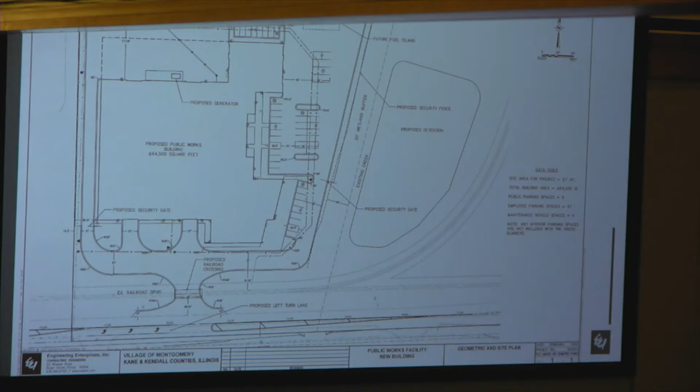And that crossing will hopefully be removed. It's our goal to get that old rail removed because it's out of service, and we're working closely with BNSF for the access across the rail as well as the removal of those old rail tracks. Other than that, I don't know, Pete, did you have anything else? That's it, unless there's questions for us right now or later.

Question: since Dallas is having all these problems, that proposed generator—is it gas, electric, propane, what is it?

So current... you want to sit down? You can sit down if you want. That's fine. You got it?

So currently, the plan is for the generator at the Public Works site to be powered off natural gas. We're still doing some calculations—we've got to determine what the loads are to determine whether or not it warrants natural gas versus diesel. That's something the electrical engineers will be handling as we get further into the project. Ideally, we want to stay natural gas; it's an easier option for us. We don't have to deal with refueling diesel, and we don't have to deal with setbacks from the building as it relates to diesel storage tanks and so forth. So our goal is to stay natural gas, but we're still evaluating.

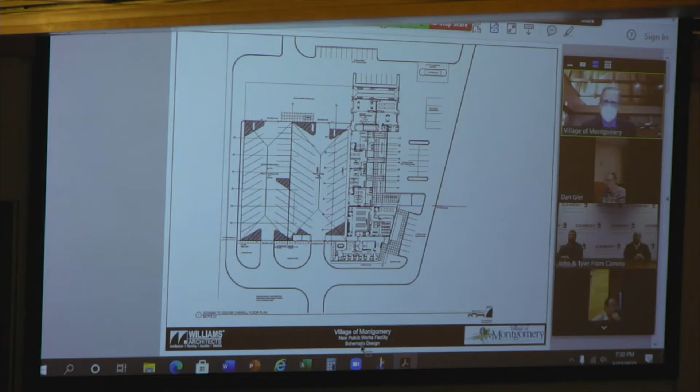All good things. All right, now if I can find the next sheet here. Do I have to stop sharing and share again and get the next sheet up? No? All right, well. Sure. That was way too easy. Thanks for that little arrow.

Okay, all right. The building's been rotated 90 degrees to have it fit on the sheet better, but this is that large garage zone. It has two drive aisles. These have all been set up in dimension to hold the equipment you have. So we have a chart showing every vehicle your department has and how big they are. We've worked with EEI to check turning radiuses, so we've got basically one-way aisles that flow through one way, then flow through the other. These various parking spaces are all sized to hold the equipment and vehicles that are going to be there, and the drive aisles are sized to allow the turning radiuses to work with the overhead doors. So it's a good, efficient building.

They'll bring your equipment inside, very important for their longevity. It also helps get the snow and ice off the plows in the wintertime so that they can melt off and be ready to go the next day. This layout's proven to be very effective and cost effective on square footage. It keeps your people working efficiently so they don't have to spend all their time moving equipment around to get one item out to get the next item out, and it really helps them work their day quickly.

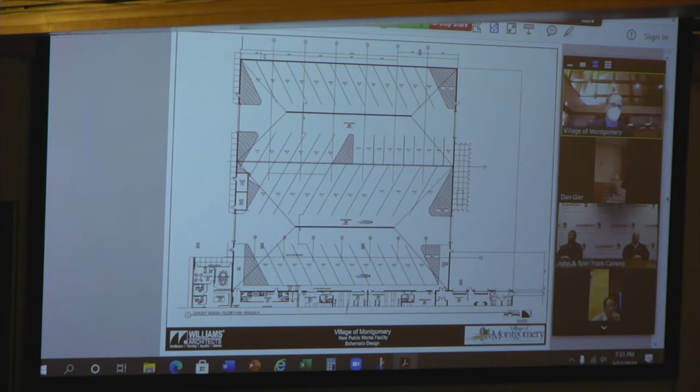All right, and then here, this area on the lower left is the administration and common areas. We have an administration zone here with an entry door off the visitor parking lot. They can come in, have reception, waiting area, back to the offices, common shared bathrooms, conference rooms, copy areas. Going to the north here, we have a split room that can be just a kitchen with a large eating area for staff to come in during snow events, so all the people can come in and catch up on what's going on. But we can also subdivide this off to allow separate training areas and events, HR training, etc., that's so important for departments nowadays.

At the corner here, we have a modest wellness area with some workout equipment to help keep the workers fit, and then we have a locker room area. The approach nowadays with locker rooms and bathrooms is not to have a male and female locker room because the ratios between male and female keep changing, and that's a problem. Folks like privacy, and the way the government's moving on their regulations, we are seeing the rules constantly in motion right now. We believe the way to stay ahead of gender neutrality issues is to provide unisex locker zones and then individual toilet and shower rooms. That means every employee has a locker, they're all in one zone. They know how many employees they're going to have, so that's the number you have. You don't have to add 10 or 20 more to account for shifts between locker rooms. We have enough of these changing rooms and bathrooms to allow folks to come in, close the door, take their shower, use the facilities as they need to. This has proven to be really effective in creating good morale, and folks just really like these. We've been doing these on police, fire stations, rec centers, Carpentersville Public Works. We did this, and it's all been very well received.

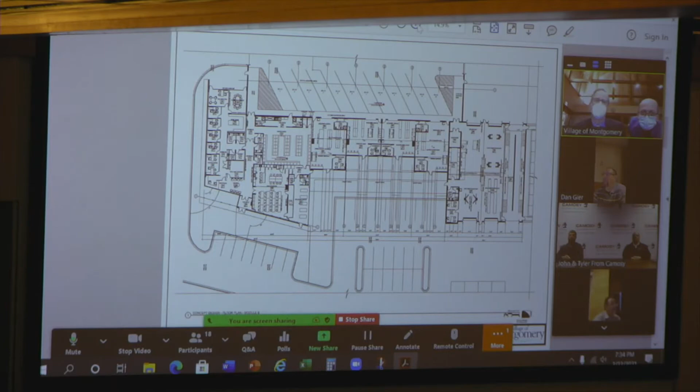Middle of the screen? There you go. All right, thank you. Oh, look at that. Is it a touch screen or no? That's really helpful. I guess I'll use the arrows.

Thank you very much for that, that helped. No problem, it's kind of squished. I mean, I believed what you were saying, but now I get to see it. Now you know what we're talking about. You can go, discover - ah, that was what he's talking about. Sorry, sorry it was hard for you to get it. That's it.

All right, so then if you want, yeah, you can scroll that around. Okay, thanks. Fine, all right.

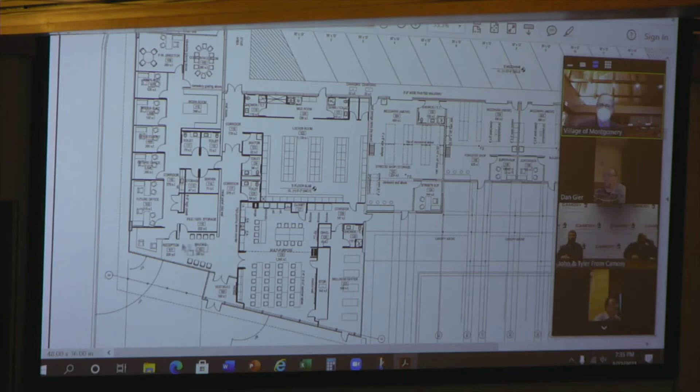So again, back to this - this is the front door area from the parking lot, waiting lobby area, reception zone when needed, file storage, individual bathrooms, computers, offices, meeting room, sort of in this admin area. And then down this corridor, you can also go to the right, and this is that lunchroom with a subdividable training area, so they can do meetings and lunches or open it up for larger events. And then behind there is, like I said, a modest wellness center with its own bathroom, shower and changing area, some vending areas.

And here's that unisex lockers with the adjoining bathroom and showers. And then this zone here is a mudroom, again very important in public works - people come back from the field having done some difficult and muddy things, especially at this time of year with a water main break. And they can come in and wash things off, hang things up, change and clean up with showers right there, so a good system.

Where's the staff entrance? Staff entrance is - they can enter the front door here, and there are doors into each of the shops. So they can come from the visitor and their parking areas out front here and get into each of their shops. And then also, as we get up here to the fleet zone, they also have parking adjacent to it, and they have doors they can get in as well. So they don't have to come in just one door.

I was just thinking flow for when a crew's out in a water main break and coming back full of mud, full of everything. Right - they would probably be actually pulling into the bay, park their vehicles right behind their shops, get out right there, and then go clean up. Perfect, thank you, very good question.

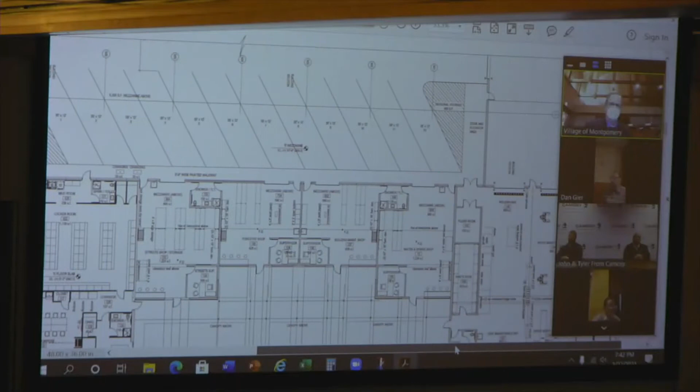Can't let you look at that yet. Good for you. All right. Yeah, there you go. Thanks. Thanks for all the help.

This whole rectangle here is the fleet maintenance. There's an office for a couple of people to work, and they have their own bathroom again with a shower, so they don't have to walk far. We have part storage that's locked off, and a room that holds all the fluids - different oils, transmission fluid, all the things that are pumped overhead to reels that they use to pull down and fill for the vehicles.

There are 2 drive-through bays that have different uses. The one in the middle of the building is for heavy-duty trucks - we have very large heavy-duty parallel pads that come out of the ground, rails that can lift very heavy trucks. These are representative of 4 mobile lifts - they roll around anywhere you want, pick things up, and they all talk to each other so it keeps everything level. You can pick up all kinds of different things with those, or move them out of the way to have a nice big zone of the floor to work on.

This quadrant is used significantly for tires and welding and work like that. This lower left area is more for vehicle pickup trucks, so working on the police vehicles and other cars and SUVs would go in this area.

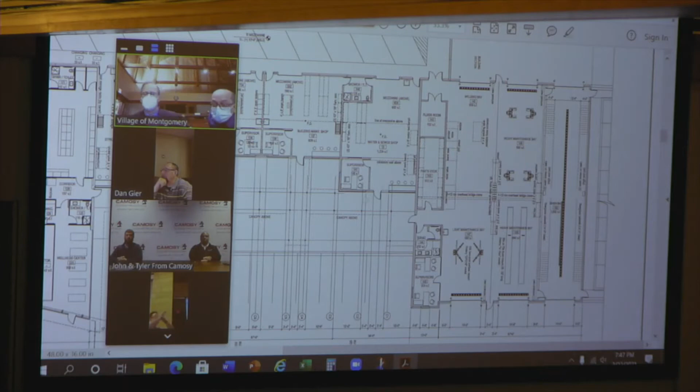We've come up with 3 exteriors to look at. They're all the same basic design, it really isn't a matter of something greatly different. We're really talking about the look and materials. There are pros and cons to the various materials we're going to look at. If you folks reach a comfort level on one of the designs over the others, that would help the team move forward with that look, along with other input you could give us as we want to further refine this.

How come you're not moving?

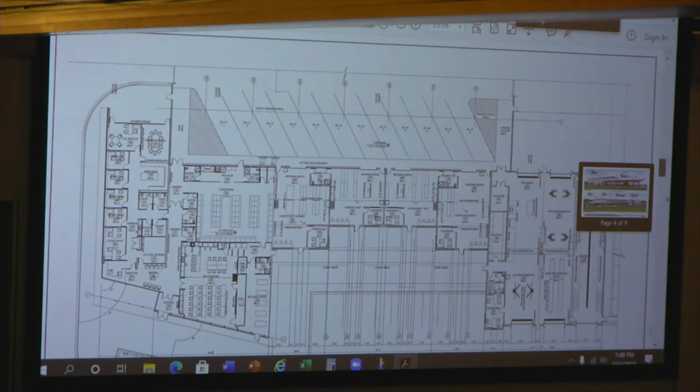Yeah, it didn't do it right away there, but it's coming now. There you go. Now it froze on you. Come on, come on, come on. All right.

This is option 1. I'll focus on one initially. This is from the southeast corner looking northwest. You'll see the large garage area up here on the upper left corner, the two main garage doors that vehicles would come and go through.

The precast panels, we're looking to put some clerestory windows around the top in certain select areas. We do that because we're trying to reduce the number of skylights we have to have while still getting good light in. None of us want to use more skylights than we have to. However, Illinois energy codes absolutely require big rooms to have skylights once you get certain sizes.

So we're simply trying to manage how many we have to have by bringing light in around the edges. This is all just precast concrete. We'll put some grooves in it, paint it nicely. Here's the administrative side of the building. This basic look we're calling sort of our brick look.

So what you'll see on the right side there is the nice overhang when you come into the building. You see the lobby area glassed in here, sort of on the right. My arrow's not showing up very well. And then the long stretch of offices with some brick around it.

Okay, moving to a different look here, different angle of view. This is more from the west looking back, you know, from the east looking back west. On the lower left zone you see the entry area, some glass to the right of that where the training room is, and beyond that more glass combined with the wellness area.

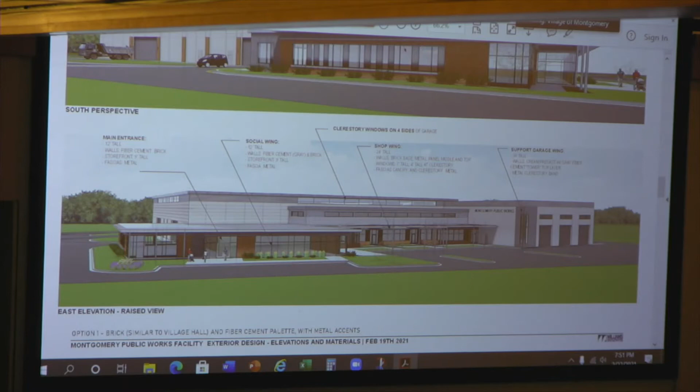So we call that the brick approach, option one. A couple more quick views of that as well. This is directly west, looking directly - on the east, looking directly west. Again you see the office area on the left, the shops in the middle, garage areas on the right.

All right, so moving down, going to look at option 2, we call it. Still trying to get past the pages here. They hang up on me, my apologies.

So we call this option 2. We're really using a lot less brick, and we're using more fiber cement panels. These are rectangular shaped panels made out of a mixture of actual cement and some fibers. They cast them in whatever shape and colors you want. Again, very durable, long-term material. But by using that material instead of the brick, we find that the buildings have more of a sleeker, more modern look. So here again we could adjust the colors of those panels a bit.

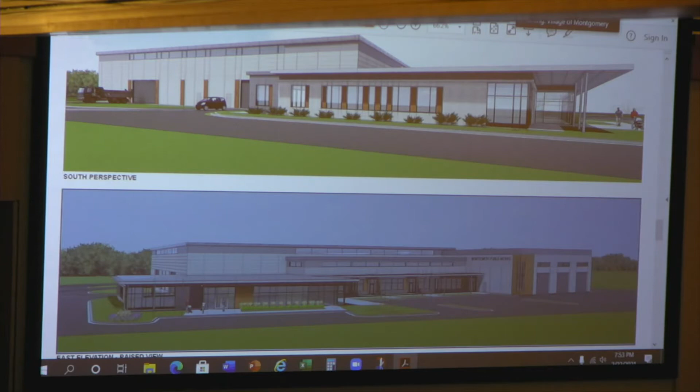We're still bringing in some pieces, some aspects of brick, on the big garage areas, also some between the windows and the office zone. And then looking at the whole building from the southeast looking northwest, we're still bringing some brick in between some window areas, the corner, and further north at the fleet area, some brick at that corner.

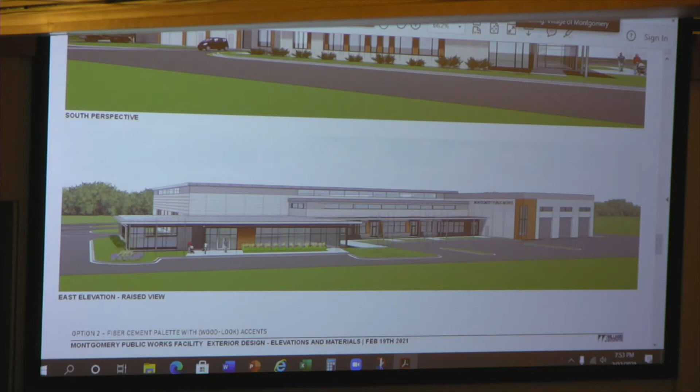But as you can tell, we've pushed the design to reduce the brick and increase the number of panels we're using. We think it looks like a more modern building, a little less brick, a little less warm, but in some places some clients really like a sleeker look to their project.

We're going to move down and see a ground angle view of this option. The upper picture is from the east, looking directly west, with the admin entry, common areas, and shops straight ahead, and fleet maintenance on the right. Another angle shows you looking right at the main entrance with glass to the training and wellness area and the fleet area in the background. So again, we've reduced some brick and increased the panel look.

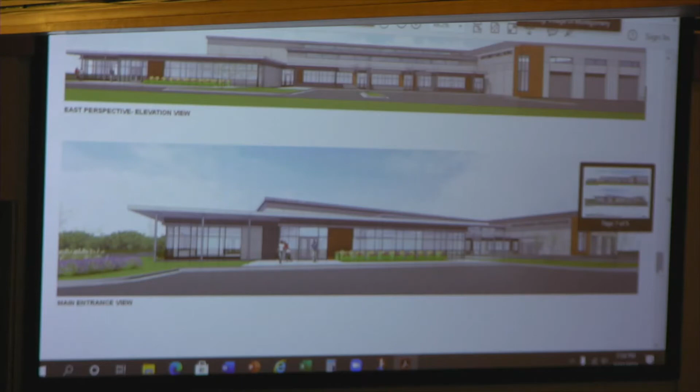Now, option 3. Here we've gone even further and further reduced the amount of brick. Frankly, I don't know if there's really much of any brick left. Sorry, trying to get the right picture here. So in this one, there's even less brick and more metal panel. Instead of the cement panels having a rougher texture, the metals are smooth and slick looking.

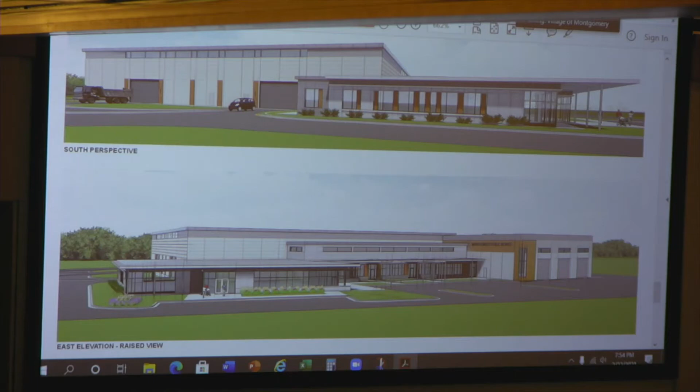So in the third one, we're thinking maybe we'll use more metal panels, so the building has a smoother look, more metal in the areas that aren't precast. Again, this pushes the building a bit more in the modern direction. These are all products designed to last for decades outside — nothing here is wildly expensive, and nothing here is short term.

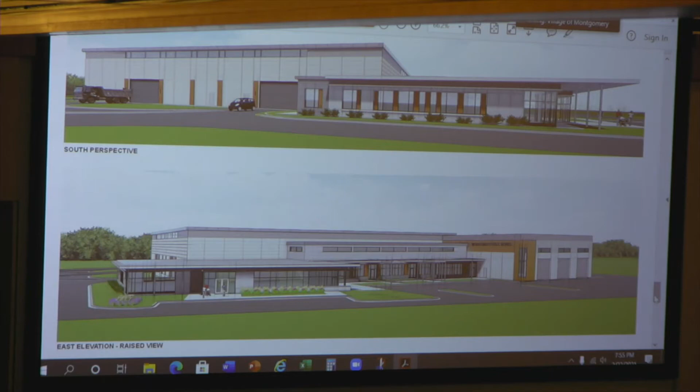If I can get to the last one of that... Can't switch between pages with the arrows. I've got to do it manually, so my apologies.

So again, looking from the east and directly west with concept 3, you can see there really isn't much in the way of brick. It's really panel systems, metal, sort of sleek looking with the glass and the overhangs.

So these are the 3 options. We believe they're all working within your budgets. They're all durable materials, mid-range. We just thought we'd put this out there, and as your architect, give you some ideas and see if one is more appealing to you than the others.

Of the 3 options, which seems to be the most cost-effective? I think cost-wise they're all in the same ballpark. To say there's one higher than the other — maybe when Camosy comes on later they could tell you if one tips more than the other. From our perspective, having had a lot of success with brick over the years, my personal suggestion would be to look at the brick one closely and see if you like it, because I think cost-wise it'll come in well, and you'll find you simply have less coating and reworking issues in the decades to come. Thank you.

If I could jump in for a minute, as staff, when we evaluated the 3 options, going along with what Mark stated, we prefer option 1, the brick option as well, mostly related to the durability factor. Anytime you start attaching fiber cement materials and metal materials, there's defects, UV rays, and different things that come into effect over the longevity of the product. Brick is brick — it holds up well, it's very durable. That's been one of our mantras throughout this project: using materials that are going to be durable. As Public Works, we spend a lot of time out in the field addressing infrastructure and different things. The last thing we want is to spend extra time dealing with keeping a building up and running. So durability has been one of our key things — as Mark talked about, reducing the amount of skylights and roof penetrations so we don't have as many potentials for roof leaks as the facility ages. Those are the things we're really trying to strive toward: minimizing the maintenance.

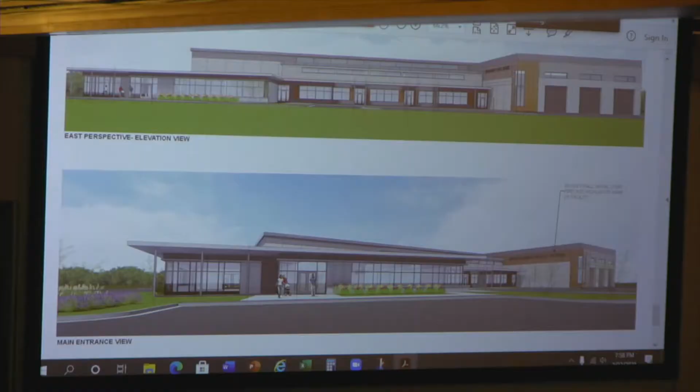I'm concerned that there's a real lot of glass around that community area, along with the whole lobby area. That's a lot of glass cleaning every week that we're going to be paying for. That's something we evaluated and looked at, and we're still looking at in this process. The energy and lighting codes reflect some of that, where glass is needed to obtain that, but that's been a concern throughout the project. Surprisingly, we've actually reduced some of the glass—I know it's hard to believe, but we've cut back a little bit. So again, something we're still working on, and good feedback to have.

I would just say that the areas with the biggest glass, other than the front entry lobby—and a front entry lobby having a lot of glass is not a terribly unusual thing, it can be a positive for how folks enjoy the building—the bigger glassy areas in the common zone are the lunchroom and the wellness center. These are fairly deep rooms with no glass on the sides, so we're trying to get enough light on this side so it can penetrate deep enough, so folks coming in to work out or have lunch still get good daylighting opportunities. But like Mark said, we've already reduced the glass in some other areas substantially. All good ideas—you hit it right on the head. We're talking about this glass right now.

Excellent. Any other questions? I had a couple, if you have a second.

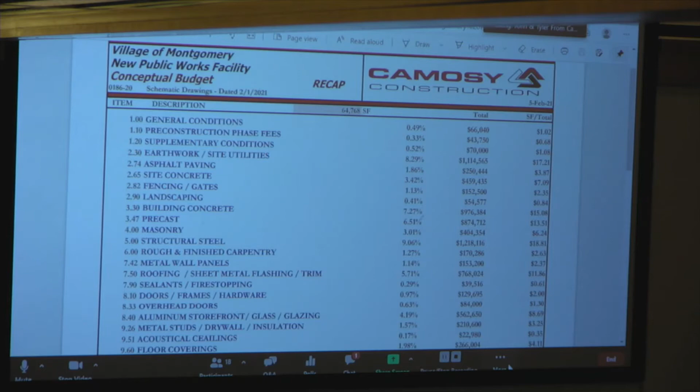You got your roofing, sealants and fire stopping, doors, frames and hardware, and your overhead door. That's pretty self-explanatory. Your aluminum storefront, glass and glazing, that obviously is, like you guys said, there's a lot of it on the building. I believe it has actually shrunk since we did this budget in terms of some of the sizing, so that's a good thing.

Metal studs and drywall, that'd be a lot of your interior walls, specifically in the administration, multi-purpose wellness area. All of the interior walls at the streets, sewer, forestry maintenance, we have all that as painted CMU block. We understand that's going to take the majority of the abuse, so putting drywall in there for upkeep is not something we want to do. You got your acoustical ceilings, that'd be your lay-in tiles.

Floor coverings, that's a lot going on in there. You've got stuff from densified concrete to some sealed concrete, epoxy. There is no carpeting, I can promise you that. There's LVT flooring in there, so that's lumped into a lot of different components.

You got your painting and your miscellaneous specialties. That's stuff such as toilet accessories, fire extinguishers, TV brackets. I will let you know that I do already have one dedication plaque in there, so that bodes well for what I just heard you guys say.

Your elevators, that'd be the elevator for the mezzanine area in the vehicle garage. And you've got your vehicle maintenance equipment. I know we've had some talks with Mark Wolf and his rep, Ron, about what we're going to be putting in there.

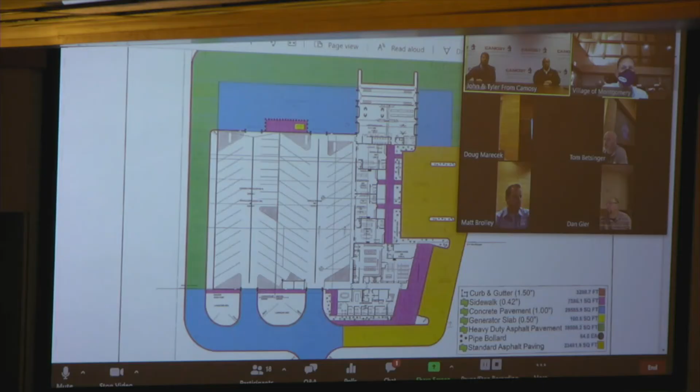All right, my last question. Can you put up the other site plan that you just had? So if you look down along the access to the south, if you pan down a little bit further... well, I guess it doesn't really help.

The railroad tracks that come across the entrance to this site, did I hear those are not in use, or are you just talking about the crossing that crosses Aucutt? So there's two. Go ahead, Mark. There's two different railroad crossings that are part of a separate project being done by EEI. The first will be the actual entrance point into the Public Works facility.

We'll be installing that crossing at that point. The other one referenced by Kurt would be a siding that then crosses Aucutt Road further to the west. That siding is no longer being utilized.

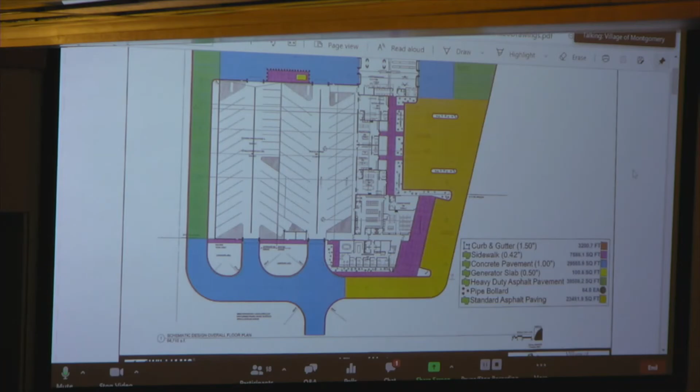We were approached by the tenants or property owners there originally when we did Aucutt Road to have that removed. Since then, we've talked to BNSF and gotten more confirmation that it's probable we can take that out. It impacts a lot of trucking companies, especially Old Dominion, and anyone carrying hazardous materials, since that's still considered a live crossing, they have to stop every time to follow regulations. So we wanted to incorporate this as part of that project, and honestly we needed to creep that way anyway to accommodate the 3-lane section.

Gotcha. So the main entrance to the site will have a railroad crossing to get in. How often is that used? Do you see that being an issue?

Kurt: It's not very often used, there's only one currently, and I don't know that it would be expanded much in the future either. But there's currently only one user, which is the paper products, I believe International Paper, who's next to us on the west. Their deliveries fluctuate, but not very often. I'd say they cross the siding 3 times a week right now, but that'll fluctuate as they get deliveries. They never halt on that line either, it's a continuous flow, usually no more than 10 or 12 cars.

So even our wait time wouldn't be substantial if we're waiting to get into that section. There'll be things we'll have to implement with our staff. If we're coming from the west trying to enter the site and there's a train, we may have to go down to the next entrance, turn around and come back as we wait. But there should be enough room between the tracks and the approach for us to have a vehicle staged, so we're not blocking the roadway.